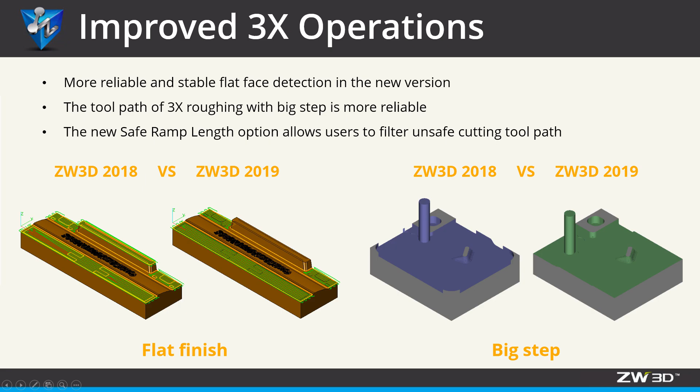Improved 3x operations. In ZW3D 2019, optimized flat finishing, 3x roughing with big steps and ramp operation deliver a more reliable and safer toolpath. More reliable flat finishing.

First, let's check the features of the flat region created in the previous version. A lot of regions have been recognized, but actually, some faces are the same face. By checking the toolpath, you can find it is imprecise.

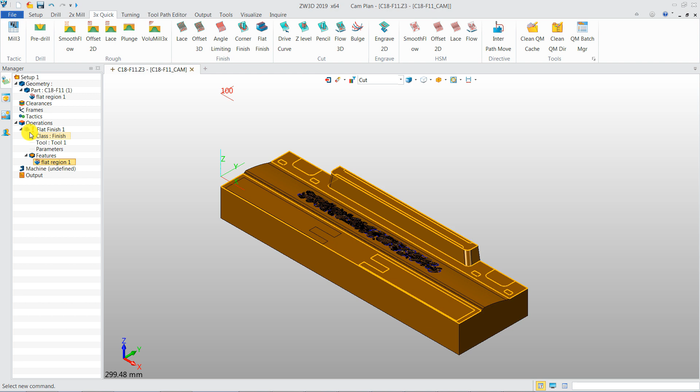Then, let's check the result of the same operation in ZW3D 2019. Create the flat region feature. Pick the part, then the flat regions are identified correctly, only 2 planes.

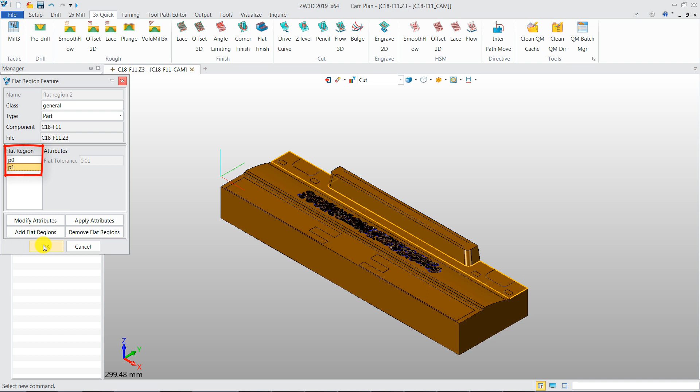Calculate, then check the toolpath. The toolpath on the plane is very regular. The inclined plane at the top of the model is excluded. In short, feature recognition of flat finish is more precise.

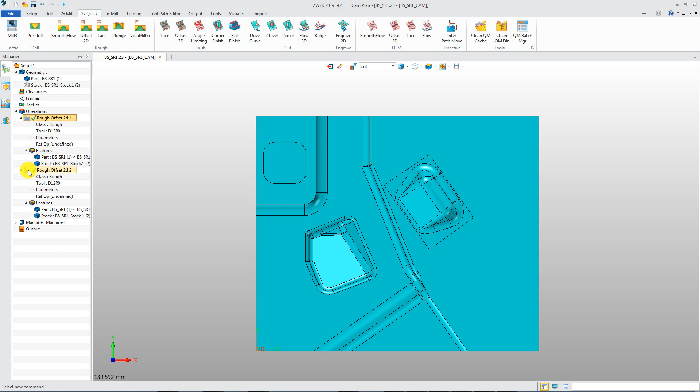More reliable big step in 3x roughing. Now, what you see is a comparison of the toolpath. The green toolpath is created in the 2019 version, and the blue one is from the previous version. Change the view for checking. You will find the step of the green toolpath is larger.

Open the parameter form. You can set the step over as 80% of tool diameter. In the new version, the more reliable toolpath is available, even in operations with the big step.

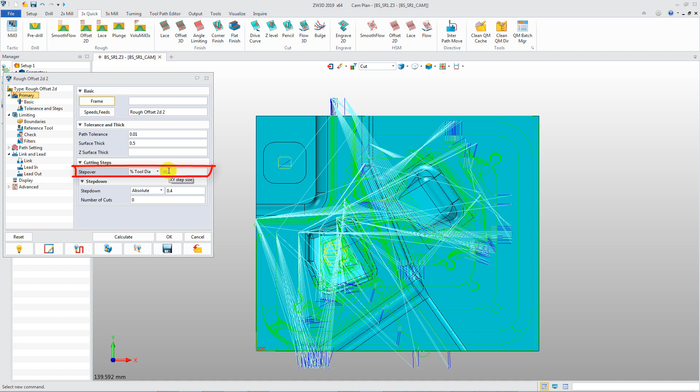Okay, let's look at the solid verify comparison. 3x roughing is more complete in the new version. Safe ramp function to protect cutting head.

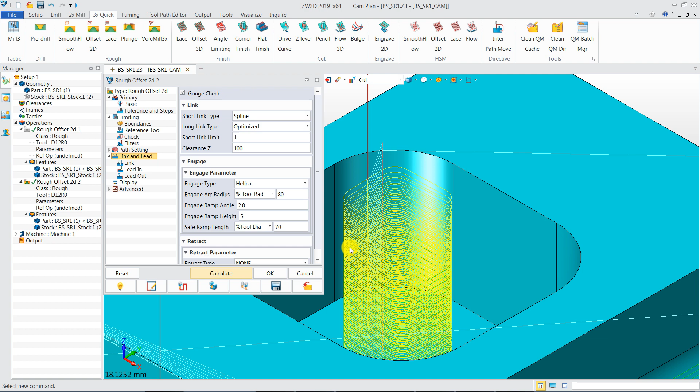Next, let's introduce another new improvement. Look at this toolpath in the small region. It's not safe in the bottom. We can set the safe ramp parameter as 70% of the tool diameter. Then, some small areas will be filtered out.

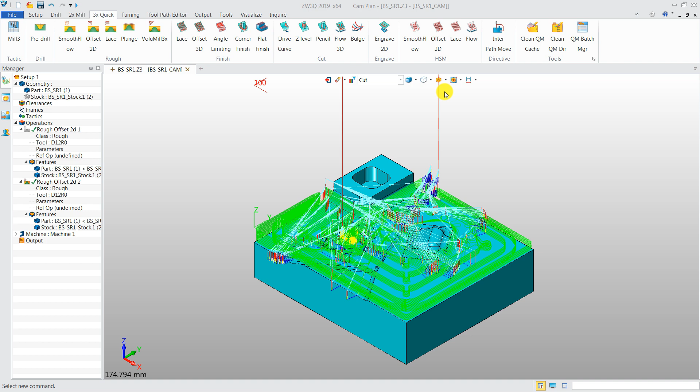The purpose of this parameter is to protect the cutting head. These improvements will deliver a more reliable and safer toolpath in 3x milling.